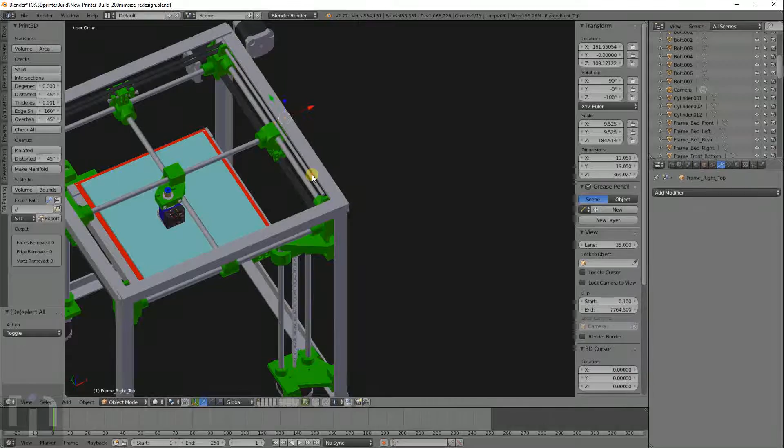Actually, let's go ahead and make the rod. It's going to be 5mm. And this can actually be a threaded rod, it could be a solid rod, it can be pretty much whatever you want it to be. It doesn't have to be a perfectly round, perfect rod. It can be whatever you want it to be. It just has to be long enough, a little bit too long, so that the belt and the motor mount plate can go on there and everything can line up just right.

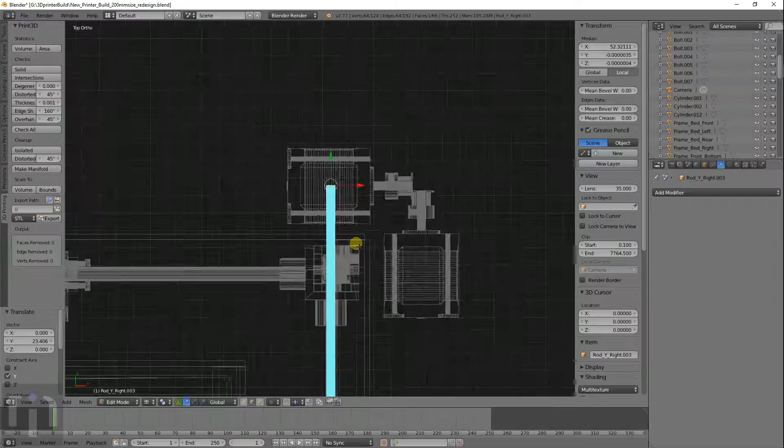And let's go ahead and line that up center here. That's pretty good. And so we got that coming out. Ooh, that's a bad spot right there on that weld. That shouldn't matter too much though.

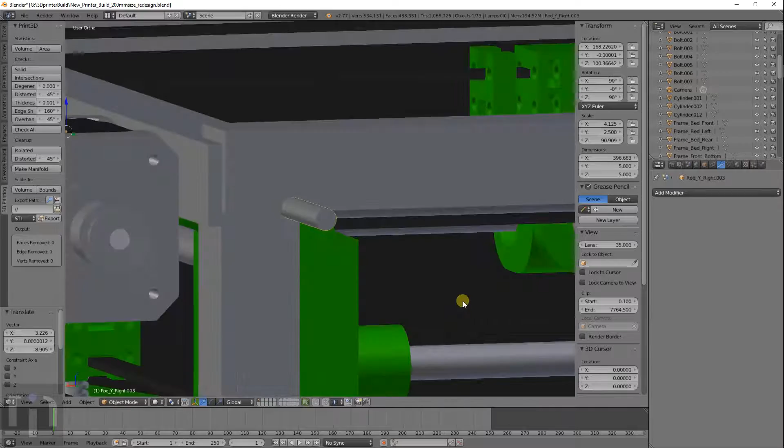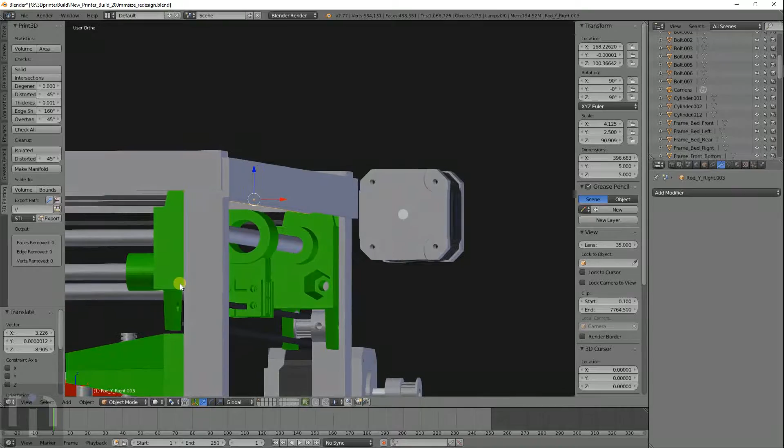So what I'm actually going to do is make it so the motor mounts on. It's going to go there. We can actually make the motor mount part of that there.

So what we can do, okay, my hands aren't working like I want to. Get rid of that. Smooth that out a little bit. So the motor mount can mount to that, at least.

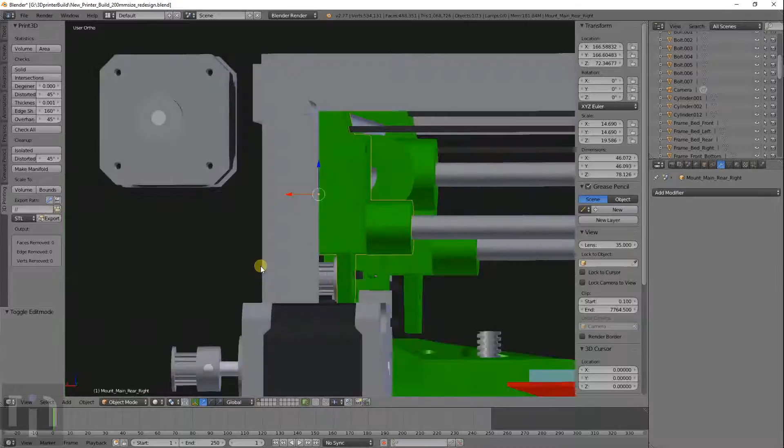We're probably going to want to have two mounts though. What I could do is make it so it mounts to the outside too. So it would mount here as well. Yeah, I want to do that. Not a bad idea.

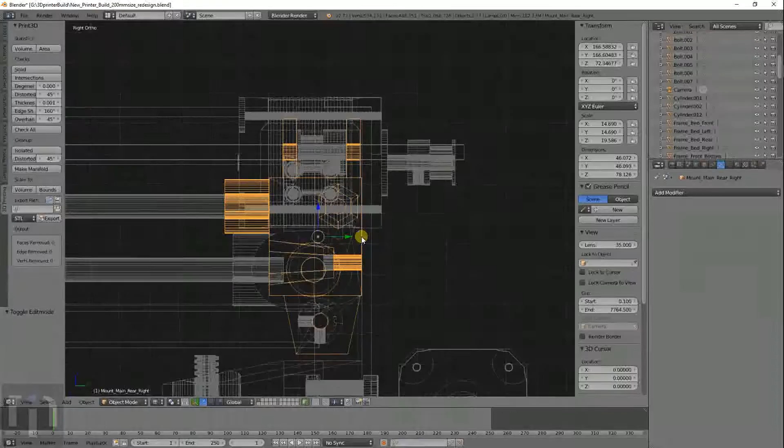So go here. Can't select anything we don't want to. Move that way a little bit more. Maybe there's less material for it to hold on to here, but it really doesn't matter. As long as there's at least 5mm, it really shouldn't matter.

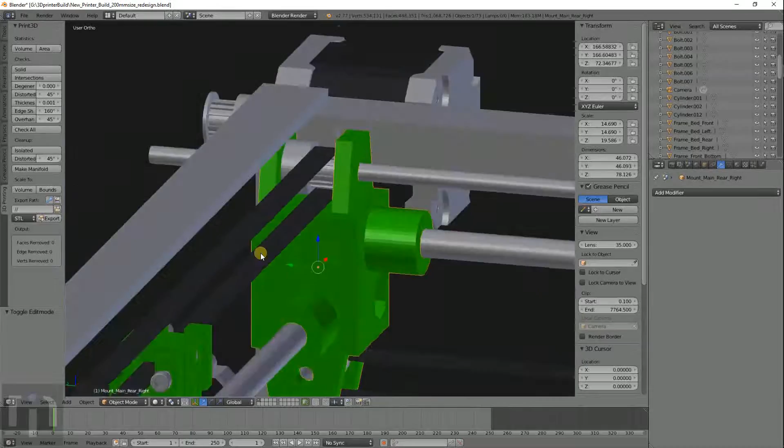Okay, so now we can make a cube. Cursor selected. Add a cube. We want this to be... let's just move that motor out of the way for now because we're not using that one right now. We're concentrating on this one. So...

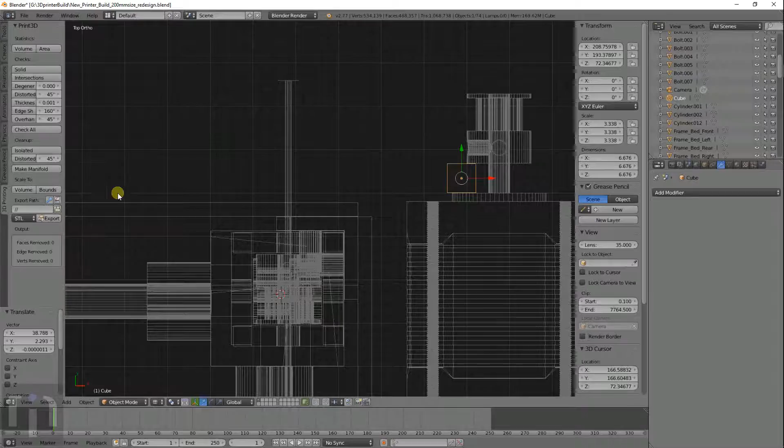Oh, I got this there. That's... how did I get that so exact? I don't know. Let's make it 6.5.

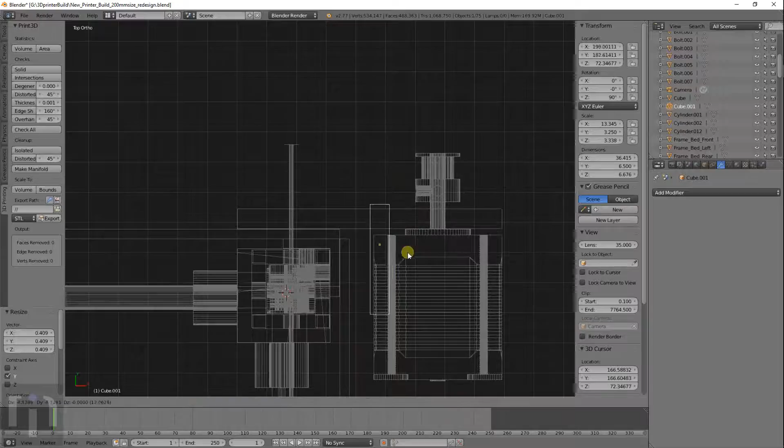Motor back. This doesn't really need to be that big, this just has to be big enough for the bolt to go through. Right there.

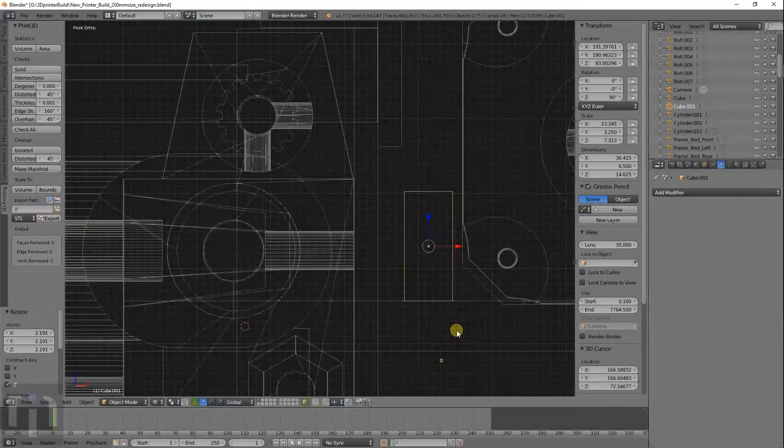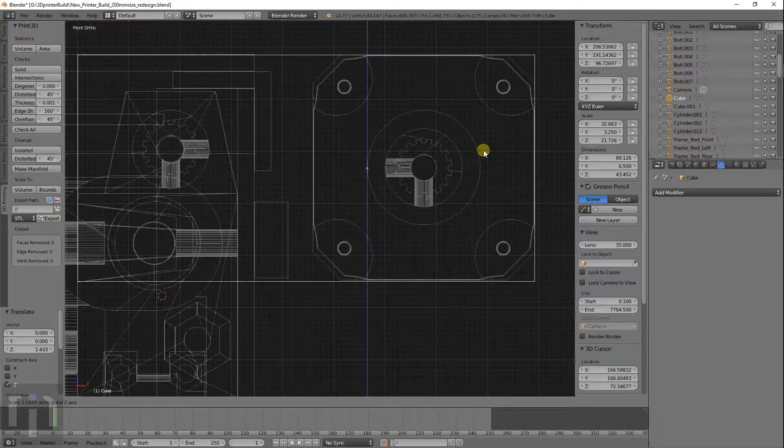And it can actually be moved in right there. And this can actually be a lot taller. Actually, it needs to be a lot taller. Z. Edit mode. Like that. Put it like this.

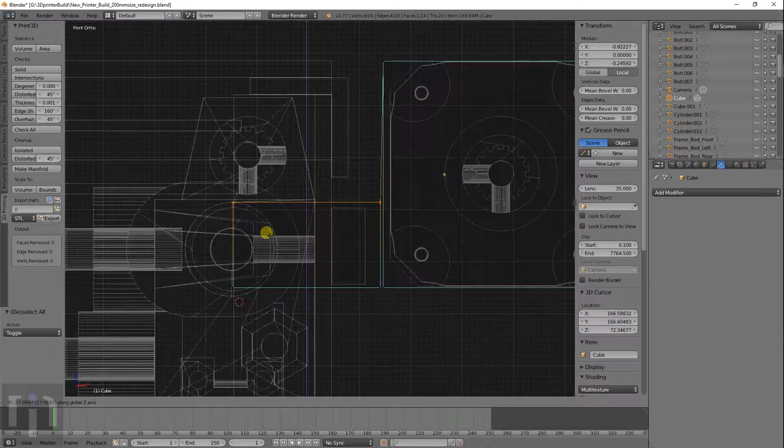Actually, it doesn't even need to go beyond that where it mounts. Let's put that there. Move that down. And this can go down here. That totally looks horrible.

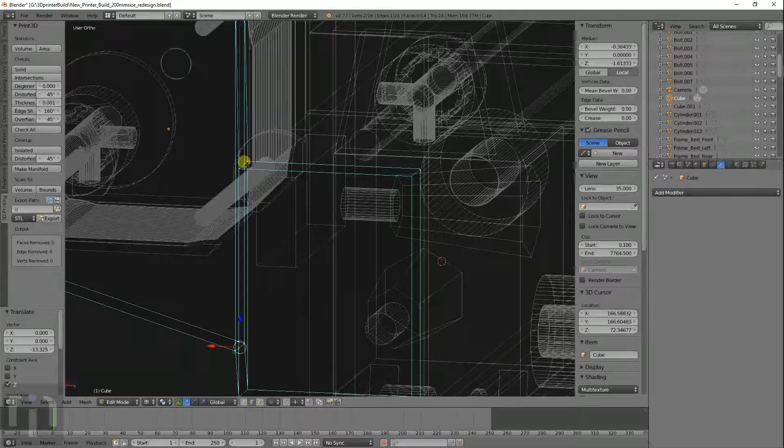So what I'm going to do is take the line mount, move that down, move that down a little bit, move that up a little bit. Actually move that down a little bit. Because...

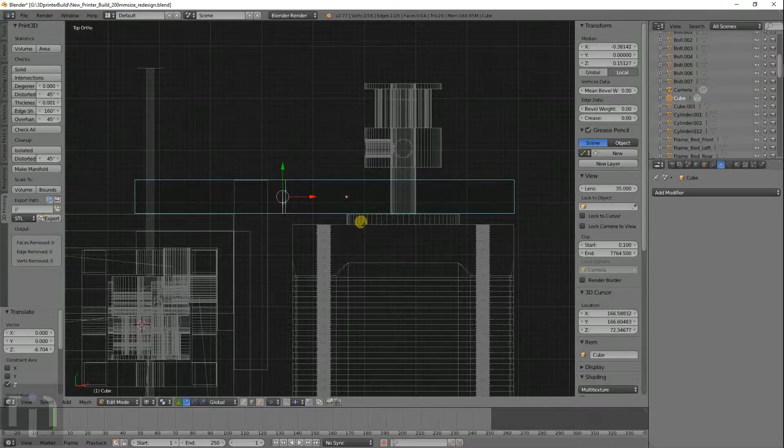That and that and that all need to be moved down here a little bit because this top rail is not going to be part of that. So that can be over there.

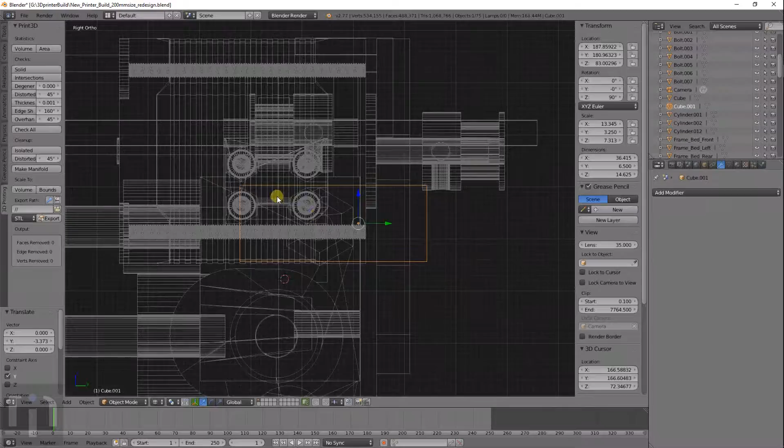That doesn't need to be that long. It only needs to be about that long there. So that can mount there and there. And...

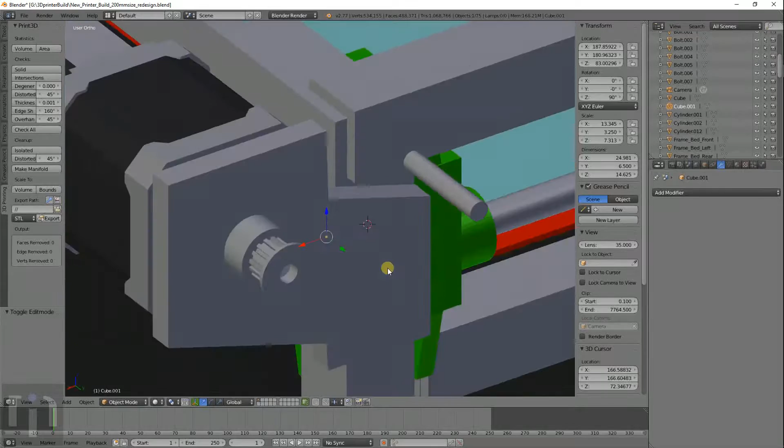Before we can put the motor mounts in and everything, I'm going to go ahead and create a cube here. Set origin with a 3D cursor. That way when I do size it, it has the correct length. So I'm going to make it 50.

Cursor to selected. Selected the cursor. And so now we can move the motor to the center, which would be 1, 2, 3, 4, 5, 6, 7. The fourth line. That's close enough there.

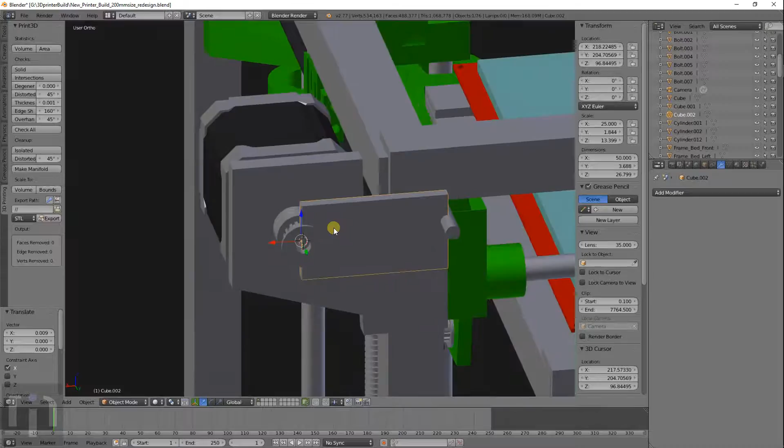So how I got this measurement here: there is a website, where to go, that is called the B&B Manufacturing. It's really cool. So if we just start out from the beginning, it's just like this. When you load the page, you go to metric, GT2, it's the size that we want to use, and the large pulley, I'm going to be using the 36 tooth pulley again. I want to pair that with a 16 tooth pulley, and I want to run the belt with a 6 millimeter belly or pulley. 6 millimeter belly, that came out of nowhere, and distance 50 millimeters.

Oh, it didn't stick when I first selected it.

So that tells you the distance between the center of the rod and the center of the pulley, or the center between both pulleys, with a 36 tooth and a 16 tooth with the GT2 belt, 6 millimeter width. The width doesn't really matter, but it shows there's 7 teeth in mesh, which is good. You want to have at least 6 teeth in mesh at all times - that's the teeth engaged on the smallest pulley.

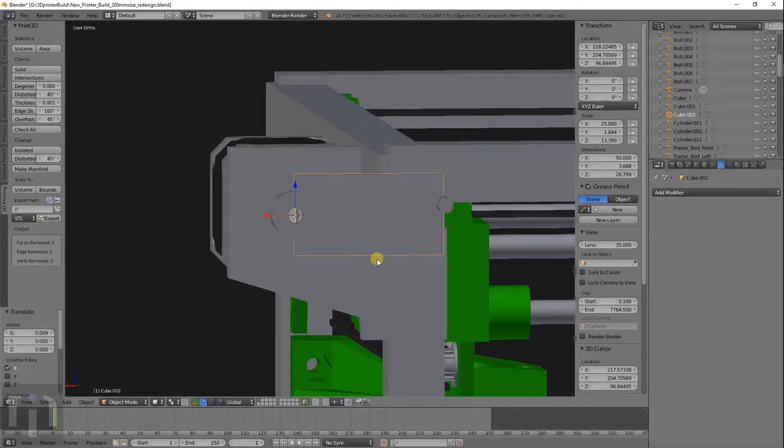Let's make this 48.5. Click the Z. So let's move everything here back to where it needs to be.

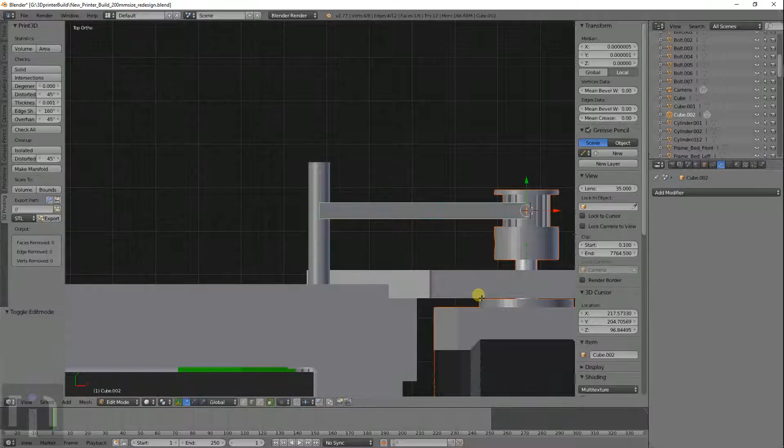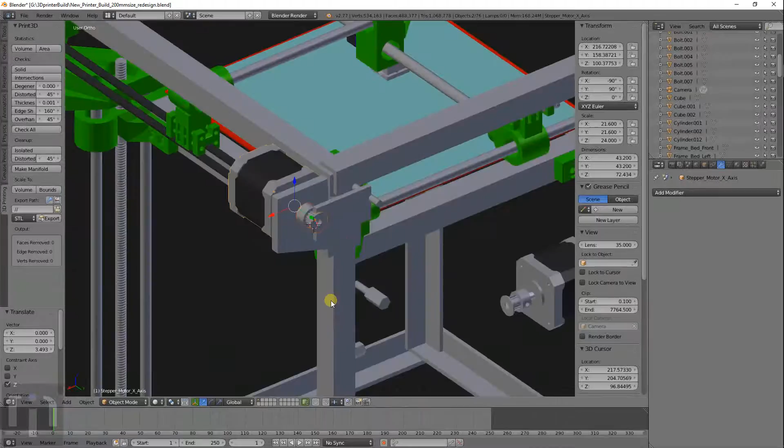And I just noticed something - the motor isn't lined up parallel with that, so I've got to fix that. This needs to be lined up exactly with it. It can be a few microns off, but you kind of want to have it the same.

So now we can edit this.

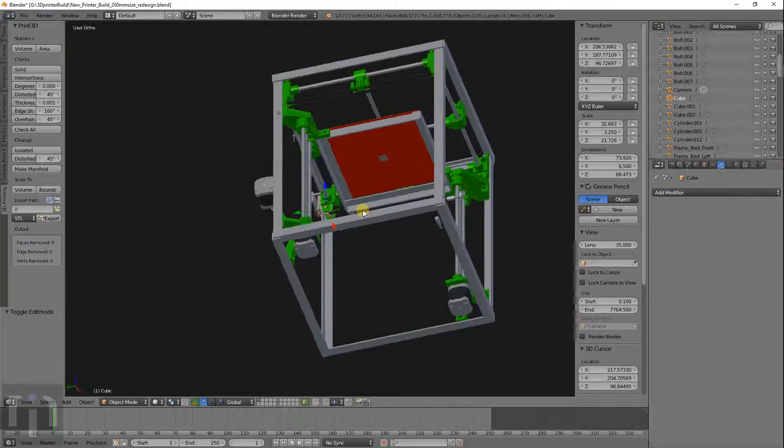Something like that. I don't know, let me see here. Do I have any 5mm bolts made up? Nope, I'll have to make one here.

So it should be a bolt, 5mm, Allen cap, length 20, split by 10.

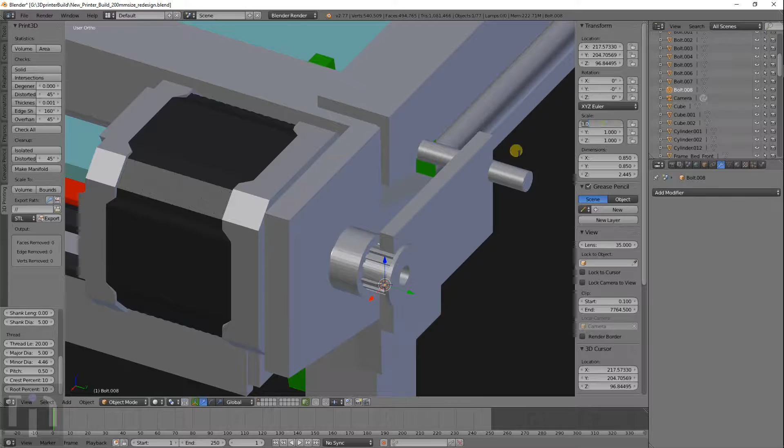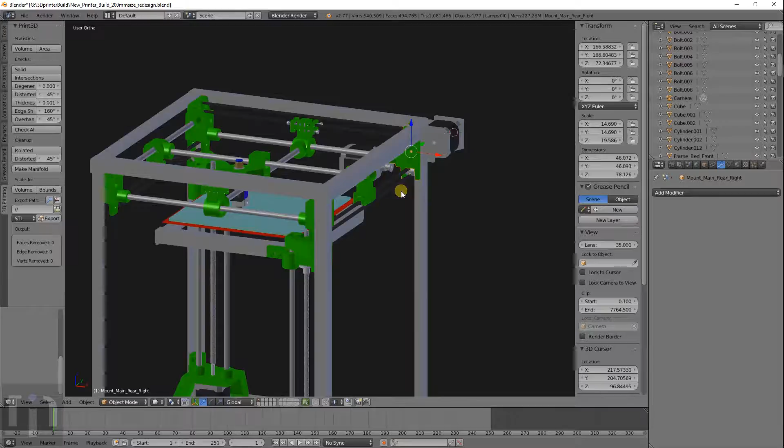That's right there. So that shows me that - that's completely the wrong one. Oh well. I'm good, it's still selected.

So moving it that much is going to make it not work. So let's go ahead and move that in, make that 4mm. That should give us enough clearance and be able to put the bolt and nut on there still.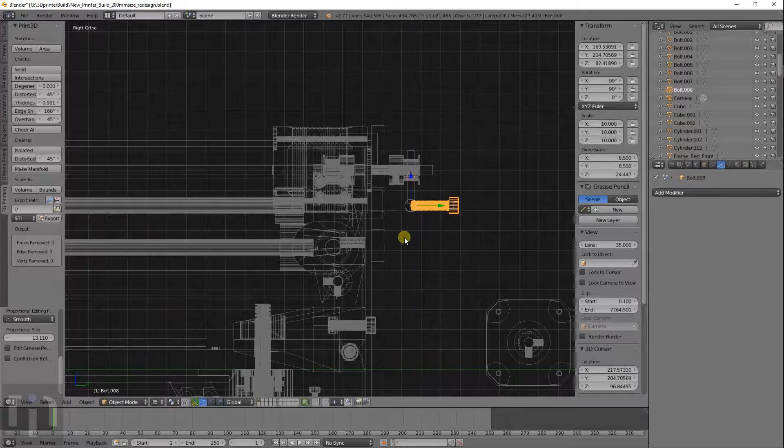Let's check the other one now. Okay, so that's going to need to move back a little bit.

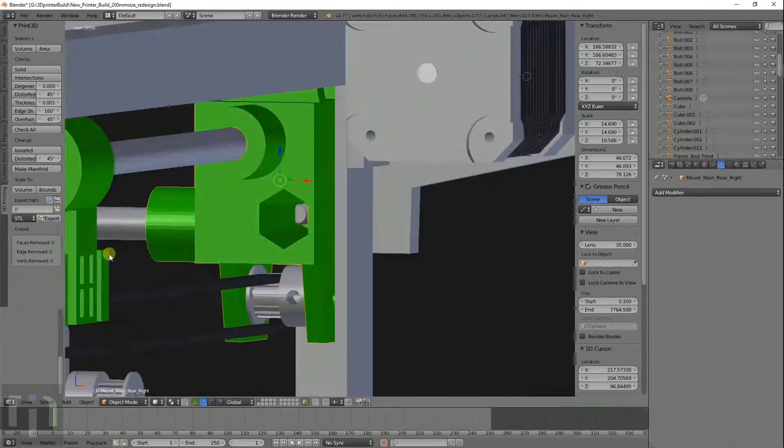For the nut to fit in there properly. So those will work. Save this because we're going to need this for the other axes, which is going to be down here, that we can just make its own mount for.

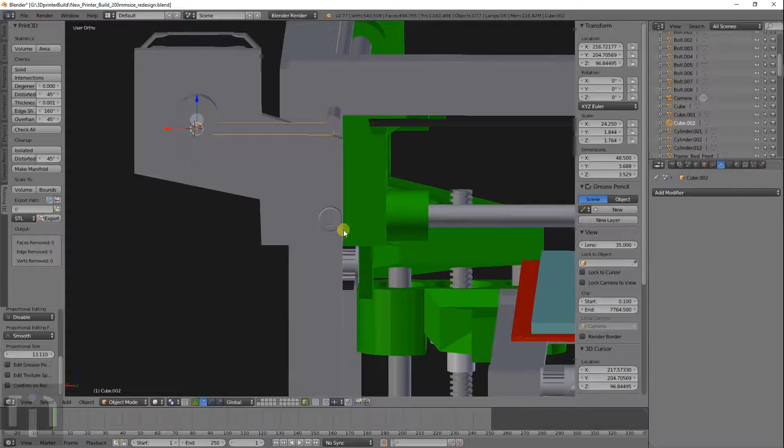RZ 90. And just move that out of the way now. So now what we need to do with this is join these two together.

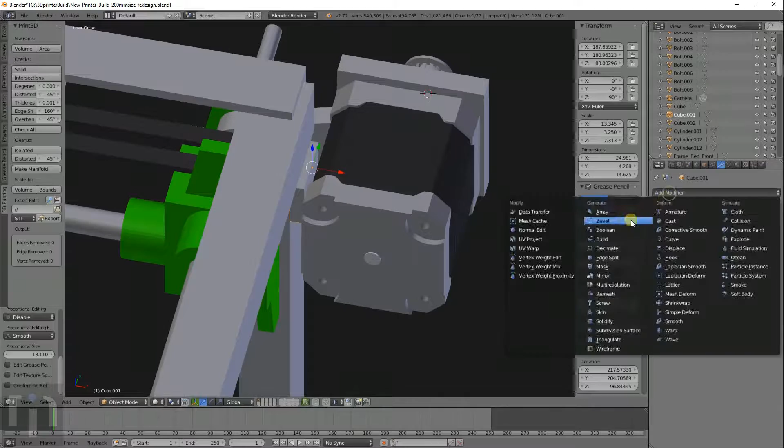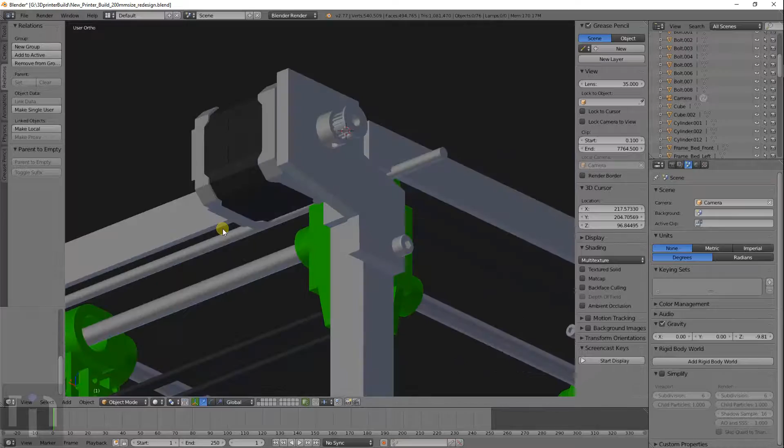So what we need to do now is make the mounts for the - what is that? Right, never mind - for the bolts and the rod and shaft and everything.

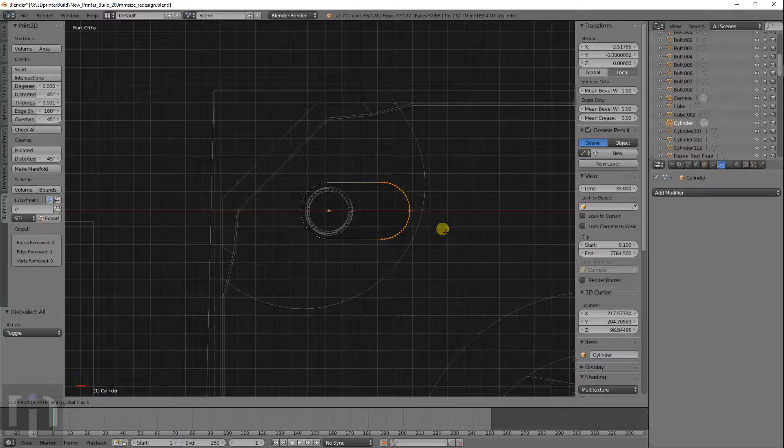And so it doesn't have to be perfect here, but we do need to make it so that it is oblong. I'm saying about there would be good - just move it so we can loosen or tighten it, probably geared towards more tightening.

So like that - duplicate it, move down. Make sure it's somewhat centered in the Z-axis there. That's pretty close.

Take these, duplicate them, join those together. And what I'm going to do is take one of these, duplicate it, hit P by selection.

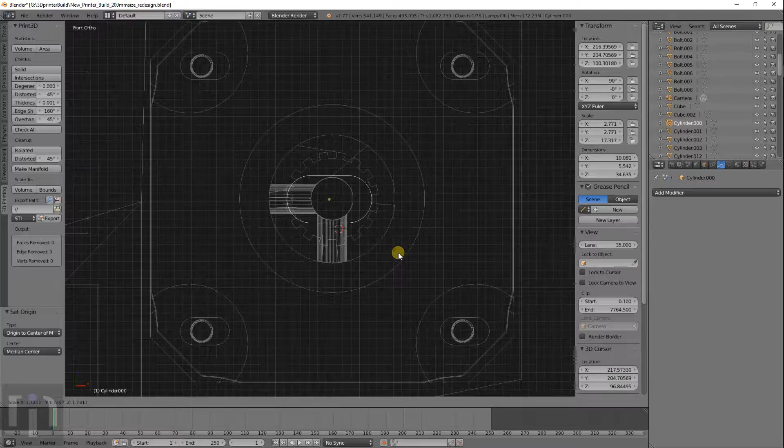Now I have its own little thing here. Set origin to center of mass. Size that up. This will be for the shaft.

Duplicate that, size that up. This is going to be for the center part of the motor, the little ring that sticks out.

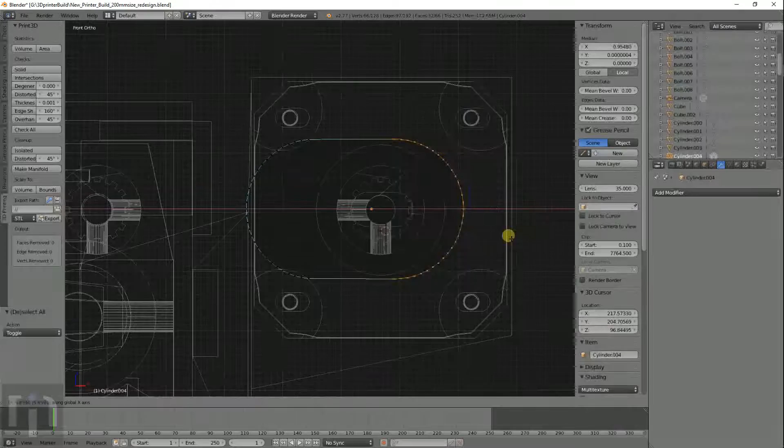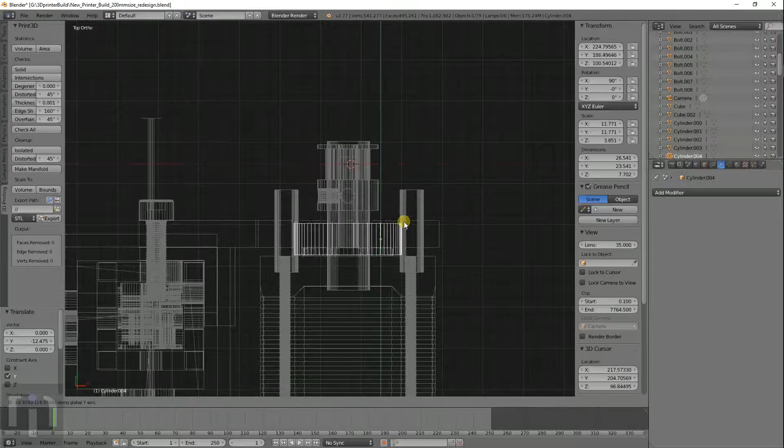That's way too long, so we can go there. That needs to go all the way through. This just needs to go through on that spot there. So these we can join together.

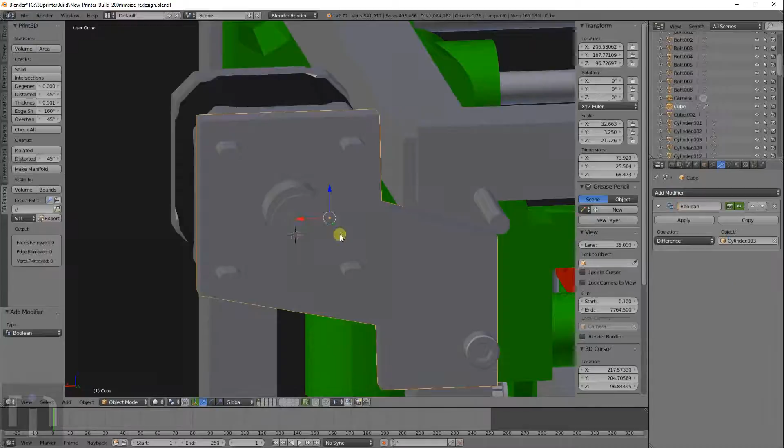That is cylinder 3 - Boolean difference with cylinder 3. Looks right, apply. And then cylinder 4.

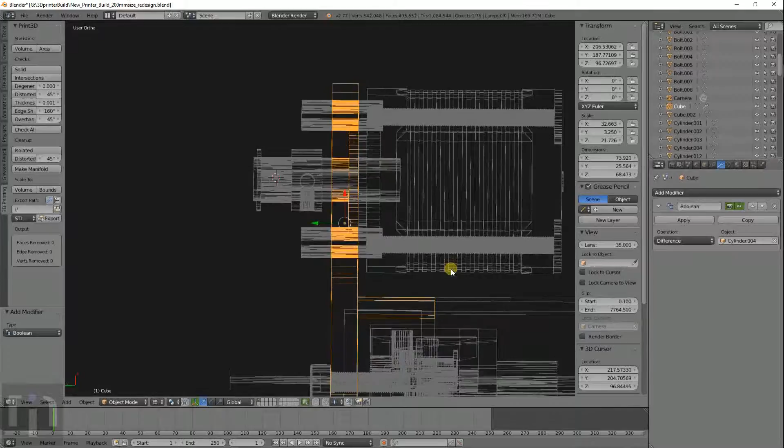Yeah, that looks right. Apply, that should be good. Now we can take these, instead of deleting them we're going to need to use them again, so just rotate those the right way. Kind of move those out of the way.

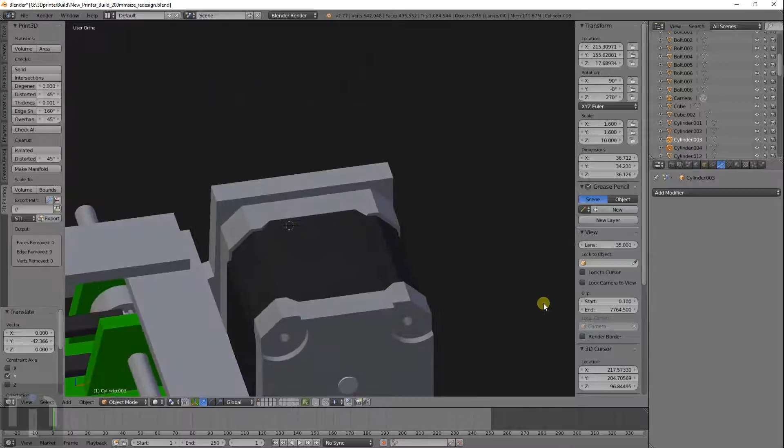So now we have motor mounts that are adjustable. I just got to do one last thing, put the screw holes, the bolt holes for this in there, and that should be good for this mount. Next we'll do the other mount.

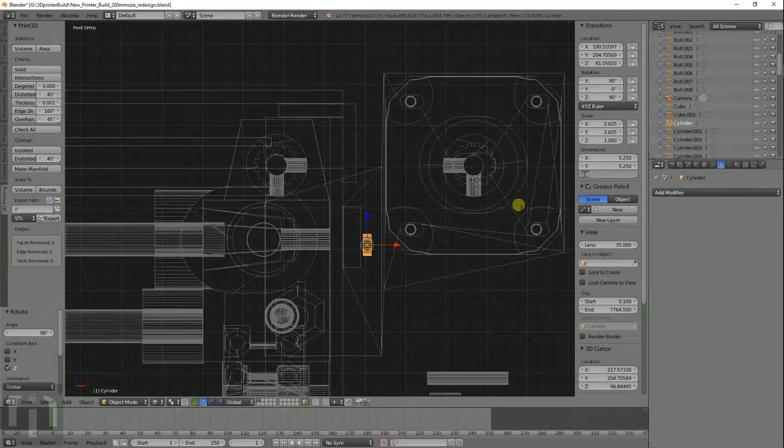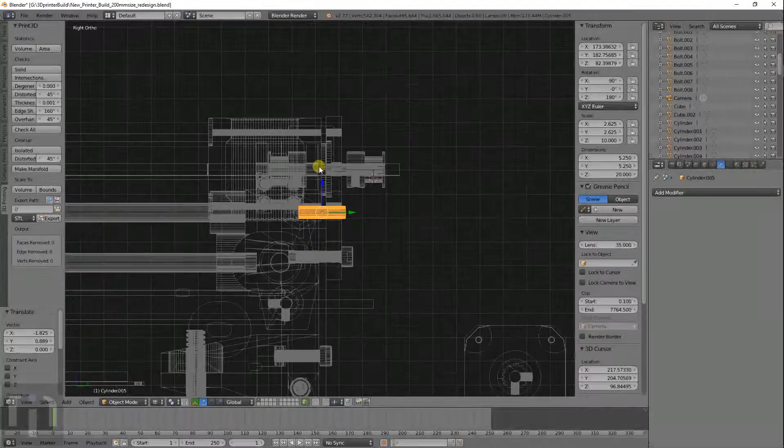So 5.25 by 20. That looks good, so far it's not lined up. Should be that one there. So let me readjust this. Duplicate, let's see, Z90. Guess that's that one. Yeah, it's right down there. Okay.

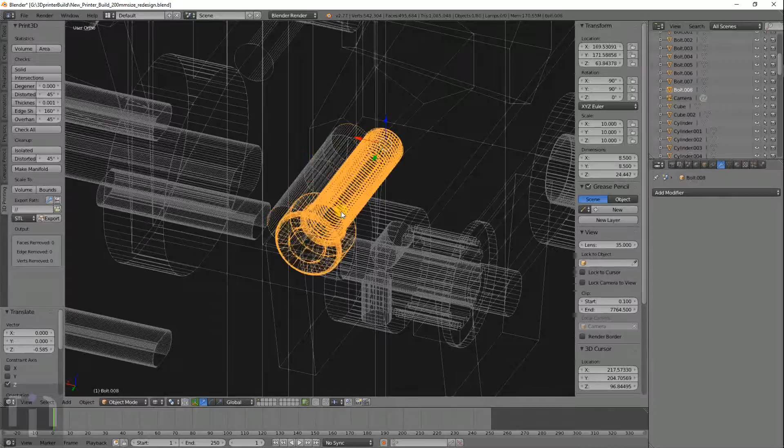Okay, that's right, and that's right. Select both of those, join them together, and just make another boolean.

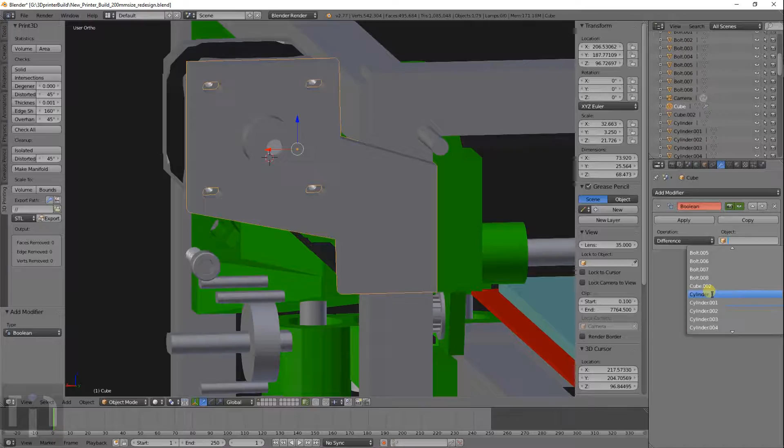And it helps to check on what you're taking out of there first. That was good, apply that. And we need one of those at least again. Now we have the full motor mounting plate. That will mount onto there and turn that rod.

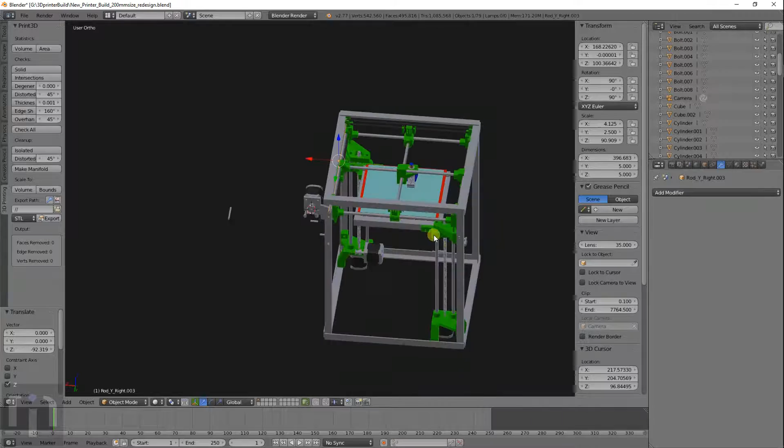And we need to duplicate this now. See, we can put the motor over here, or we can put it over here. We can put it anywhere we want, but I'm just going to put it where it's going to work. Which would probably be about right here. And this, I hope, doesn't interfere like I think it might. Sometimes you don't find out until you do it, and it's too late.

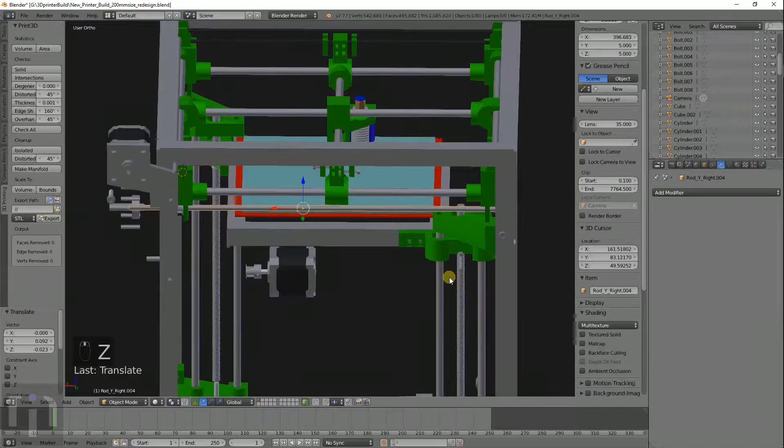Center there. I should have the screencast on. There we go. And okay. I was thinking it might interfere with that motor there, but it's not.

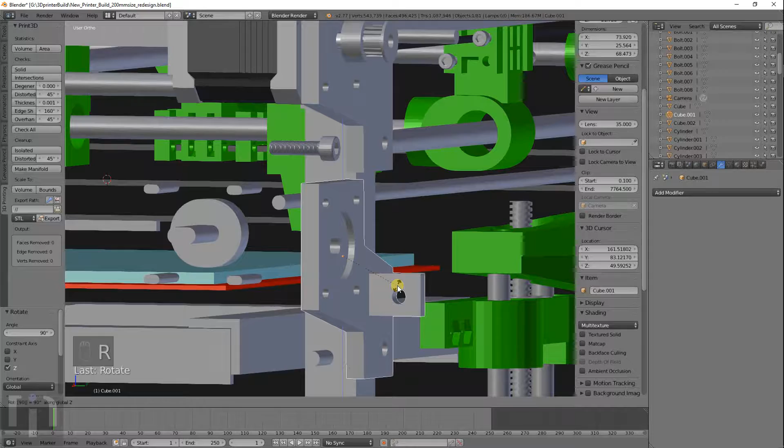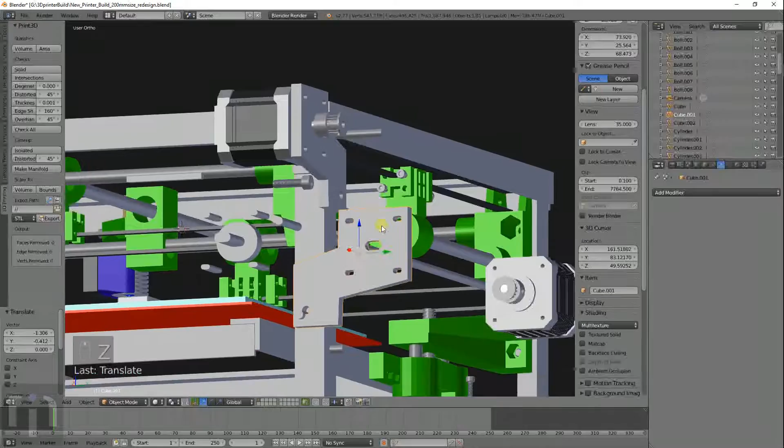Trying to cheat again, hopefully this will work. We don't know, we won't know until we try it.

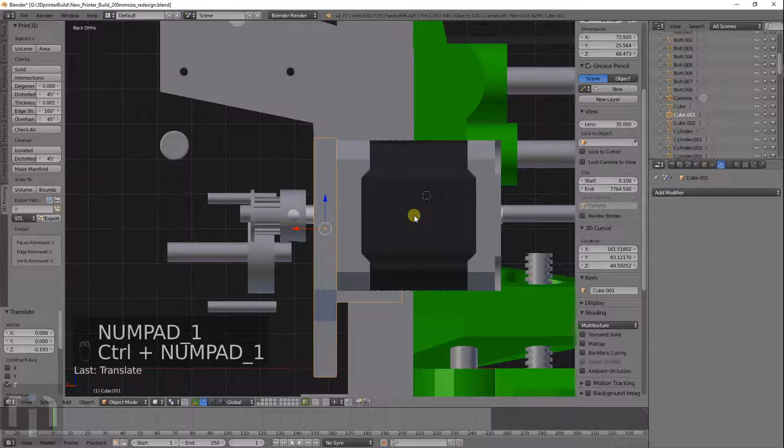That's the rod there. So it's that one there we need to line it up with. So I got that, and that. No, not that, that. And the motor mount. Line it up there.

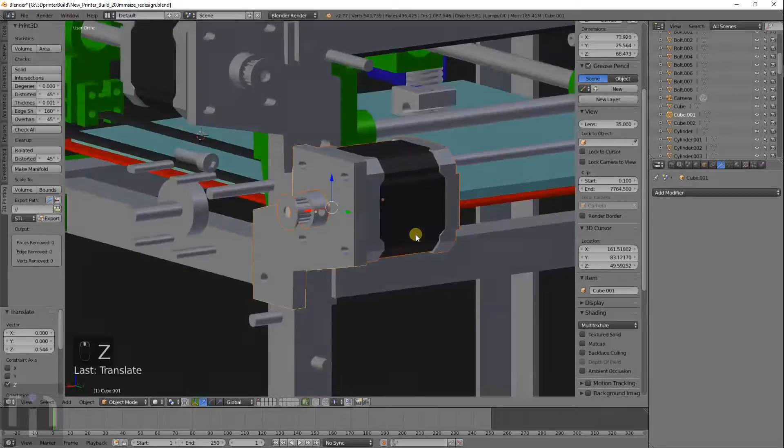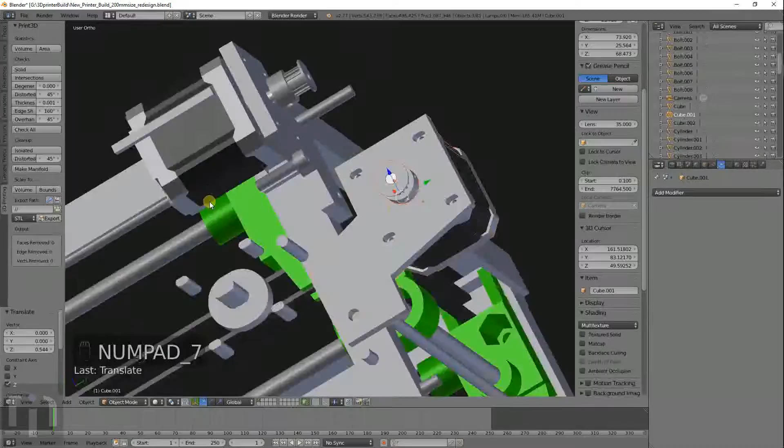Will that work? Yes, that will. So you can just bolt it directly to the frame without this up here. We don't need to make another one because we got that one made, except I just noticed something - it needs to be like this. Be like that.

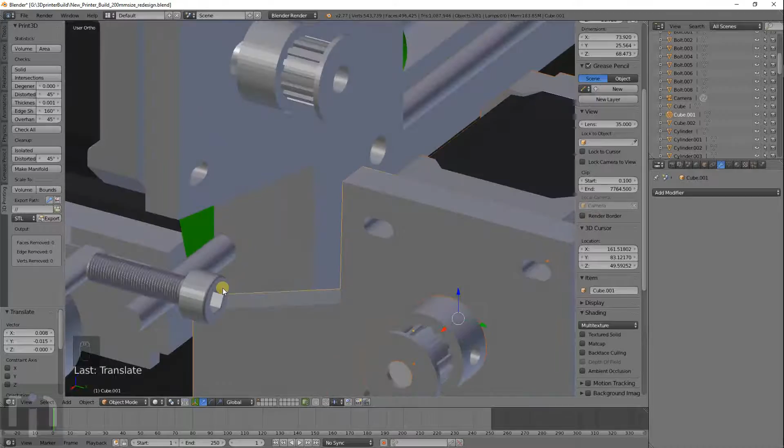And let's take this and go. Yeah, that's going to be a problem. Darn it. Let's check the measurement though.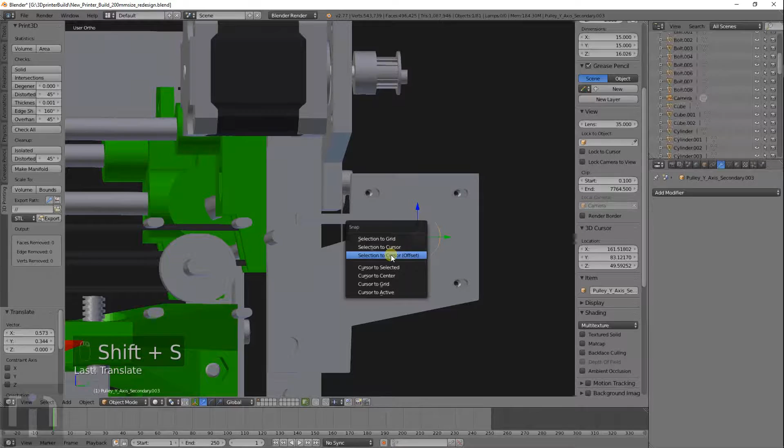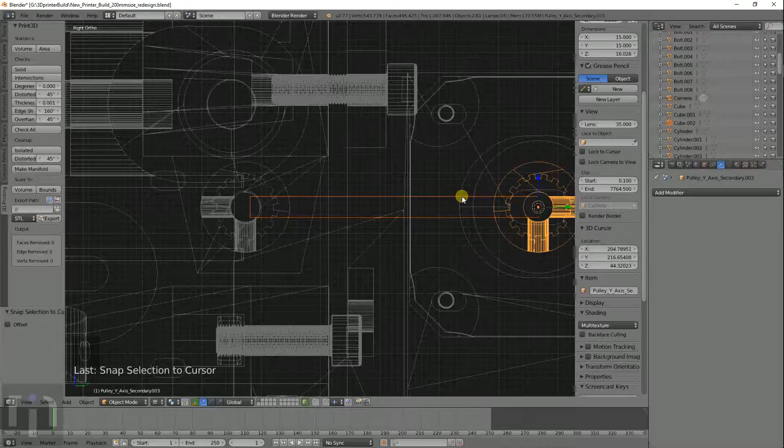Cursor deselected. Selected the cursor. Oh wait. Cursor deselected. Selected the cursor. And looks like that's zoomed in a little bit.

What we can do is keep the mounting and everything in the same spot. Move everything down a little bit. Okay, that's out of the way.

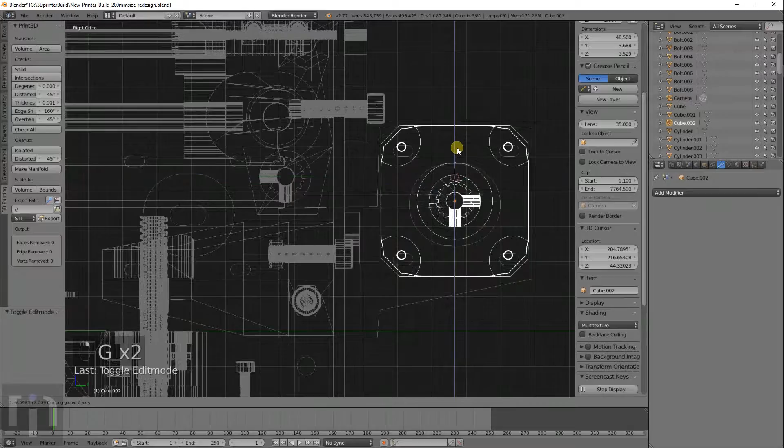Rotate that. That way we can take this, bring it in a little bit.

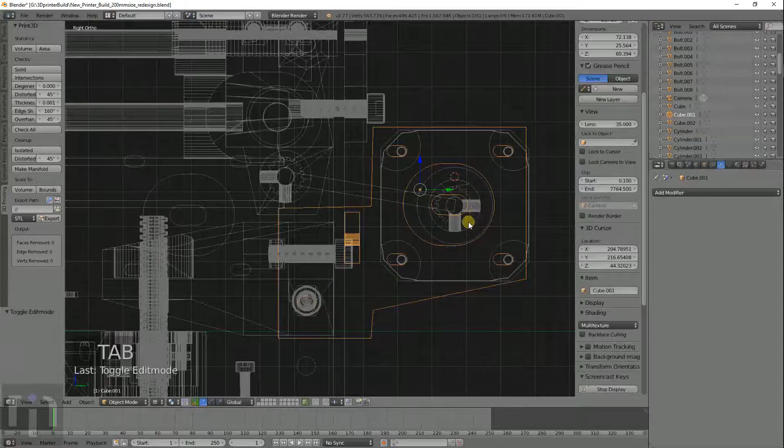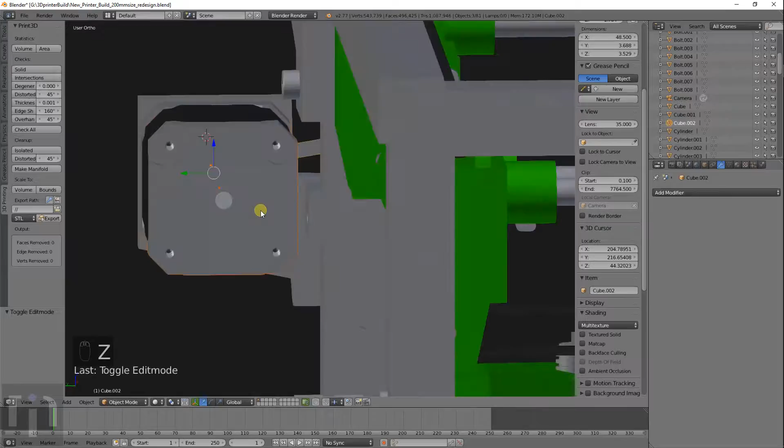Okay, so it looks like it's somewhat centered there. It's the same length, that's lined up there. It's not exactly lined up, but it doesn't have to be. Nothing's touching there, it's mounted properly there.

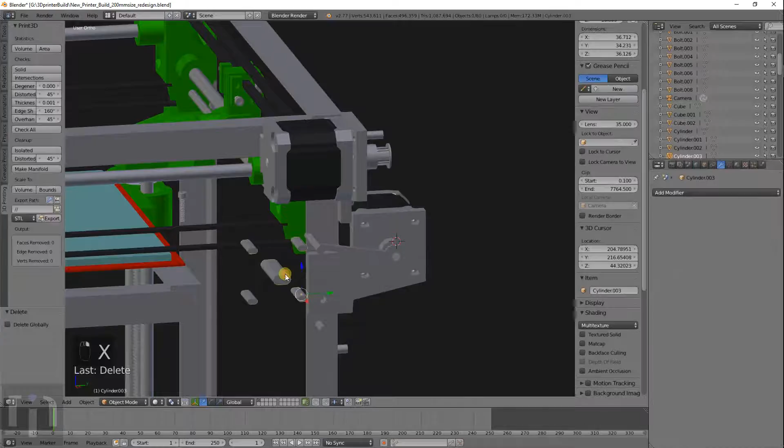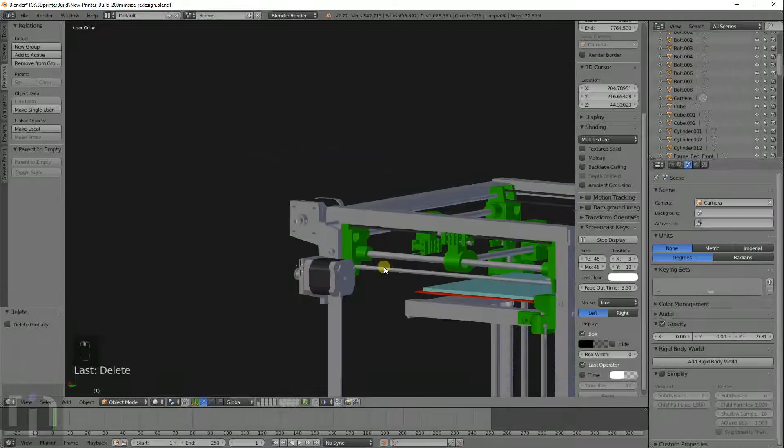And so that looks good. We don't need these after all. If you don't have to make something more than once, you shouldn't really have to. Probably put another mounting hole there, but not really needed 100%. But it works, that looks like it's going to work. It's a horrible spot for it to be going through the frame there, but it is what it is.

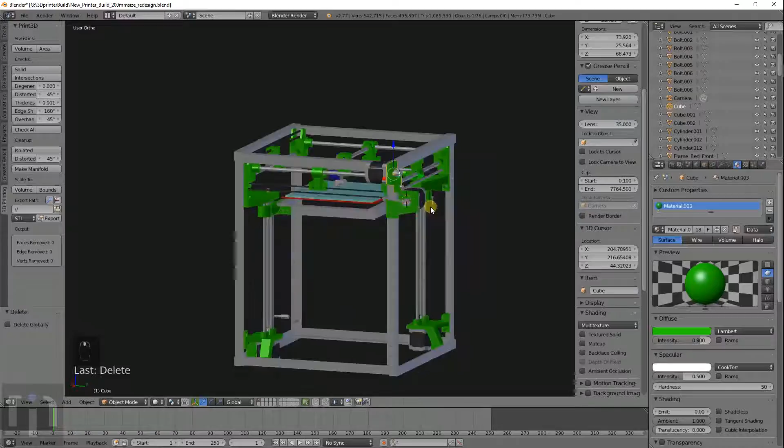So now these are both done. We can change these to our finished color. That's the motor mounts for the X and Y. And that, I think, is almost it. It's got everything there. That's all made, that's all made there.

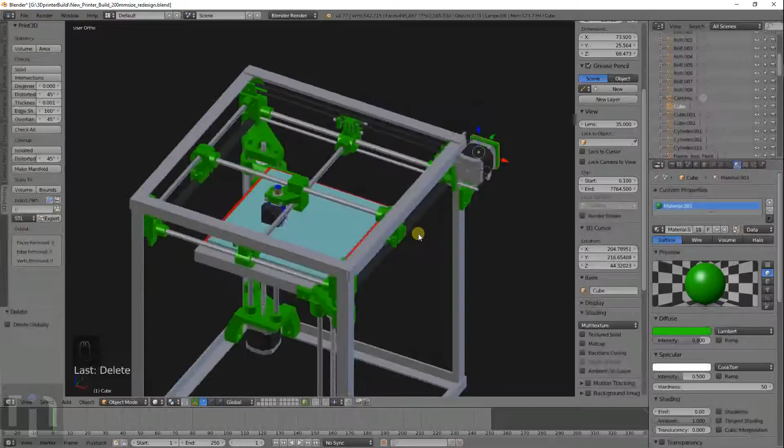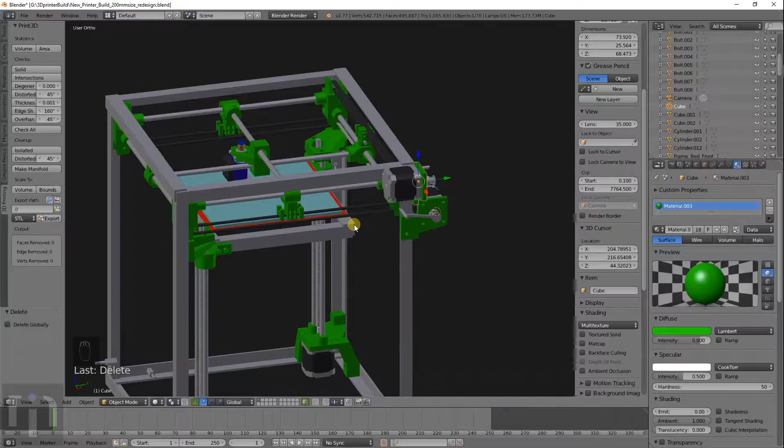Can't think of anything else that would need to be made. Got all the mounts made, motors attached. Oh, the extruder, yeah. I already got one of those made though.

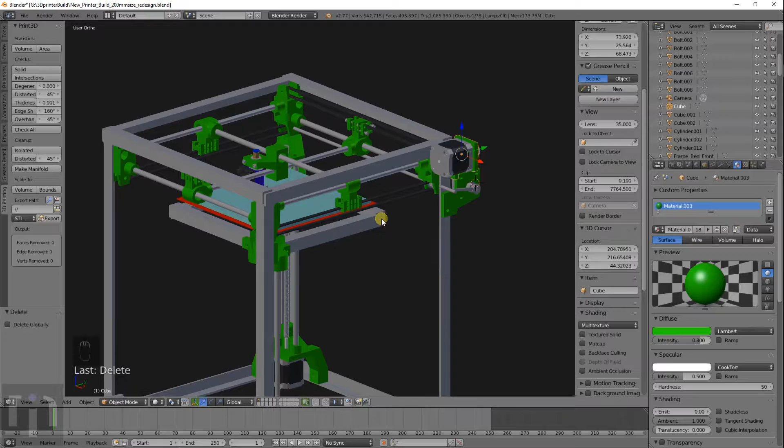So I think the next video I'll just do finalization, and pretty much that's it for this printer. It's ready to be made. And as soon as I get my big one I'm building done, I'm going to go ahead and make one of these and just use all the parts off my current printer that I have that's working and kind of make a new one, because this should print way better than my current printer. It prints pretty good, but this one is a lot more precise. Anyway, that's it for now. Stay tuned for the last episode, should be the next one. Thanks for watching.